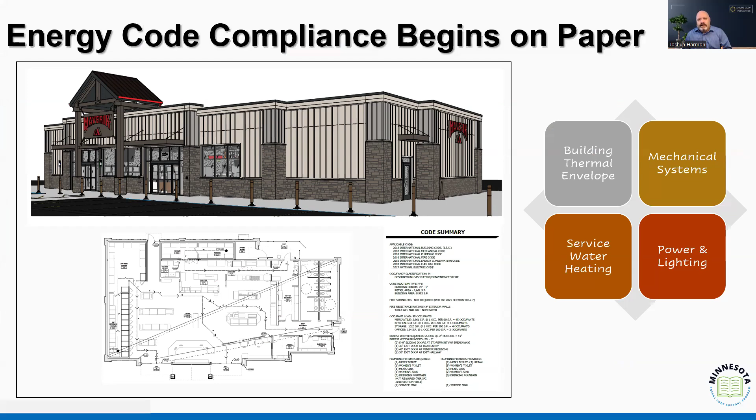When we talk about energy code compliance, we know that it really begins on paper. It begins with a set of construction details that give us all the things we need to know about how this project is going to work.

This is the relationship between building inspectors and plans examiners. This is why I've used this example before when I ran my department. We brought the two together, made sure we had staff meetings as a whole, even in a large jurisdiction with hundreds of employees. Every once in a while we would get together to make sure we had a consistent conversation about what I'm doing in the field and how that's being supported in the office, and vice versa—what are we missing in the plan review that would better serve the inspectors in the field, making sure that conversation is a two-way street.

Part of what we see in the energy code is a series of 8 different specified items that should be part of that construction detail. We talked about plan review last week, that's a different series, but we'll see here the dovetail between the two.

Energy code starts on paper, but energy code compliance requires inspections. There is no way that I, as a plans examiner sitting in my office, am able to use my binoculars and see every project. To the best of its ability, virtual inspections haven't gone that far, so we need people in the field actually verifying the installation of our building components and that they're being properly installed.

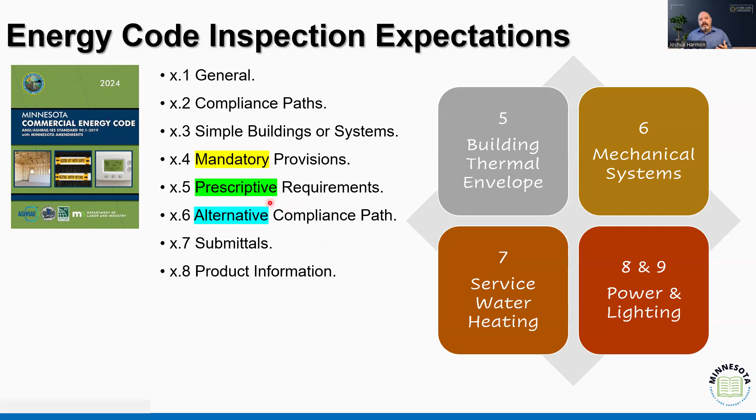So what we see in energy code is a recognition that energy code compliance paths are important, and as an inspector, they're important as well. This isn't just something we do at the front end of the process and then move on, saying okay, we're done, we don't have to worry about it again.

It's fundamentally, at least in my opinion - I was told earlier I've probably drank the Kool-Aid. I at least got this, I didn't drink the whole jug. I'm not the Kool-Aid man, although I do have a similar hairstyle - that's a reference for the older crowd in the group.

What we do see as an inspector, it's important to understand: when is the project following the prescriptive expectations of the code - the letter of the code, this is the method of installation, this is what I'm expecting - versus when we're using one of those alternatives? When I'm seeing an energy cost calculation, a performance design that incorporates different methods or levels of insulation - if I know I need an R20 in the wall and I go to that wall and it's got an R15, I need to know: is this a prescriptive project where that is not correct, or is this an energy rating or performance rating system compliance path where that might be appropriate given other components and characteristics I need to be aware of?

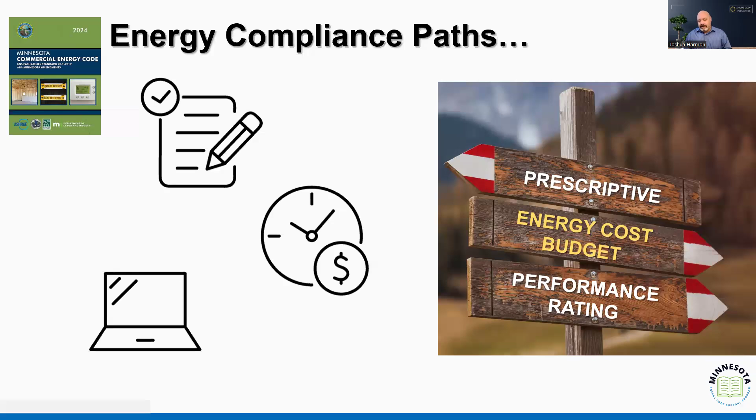My wife makes fun of me. She said, didn't realize you wanted to become a teacher when you started in inspections? No, but in our reality, that's kind of what we are. As inspectors, we don't just bring the hammer - we sometimes use the kid gloves and say, look, this is how this needs to be done to get it effectively installed.

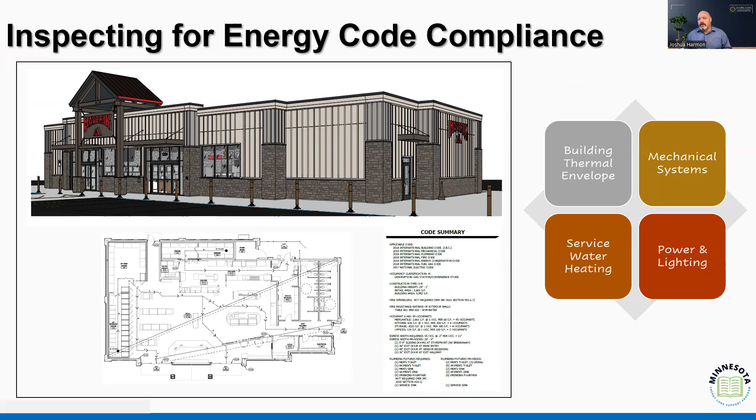Moving on - so when we start talking about inspecting for energy code compliance, we're looking at these four specific pillars of energy code compliance. Based on our understanding of the inspection and the information identified in the energy code, we can expect what we're going to inspect. There are certain components that we've been told in chapter 4 need to be provided, and as we go through each of those chapters, it reinforces some of those inspection expectations.

We're looking for things like insulation, fenestration, mechanical equipment. As we've talked about, there is no energy specifically used in the daily operation of insulation - my window doesn't have a power cord, my wall doesn't have a fuel burning furnace powering the insulation. Those are systems that work together to help the mechanical components properly operate, to effectively and efficiently utilize their energy sources to provide their expected purpose, which is probably going to be heating and cooling.

And especially this time of year, it's time for the heating, right? As we'll talk about throughout this series, when we talk about inspections, we're really talking about how they all work together. To just do the mechanical inspection and ignore the building thermal envelope would really be ineffective. It doesn't matter how effective - I can have a 99% efficient furnace, and if I have a hole in the wall, it's still going to lose heat.

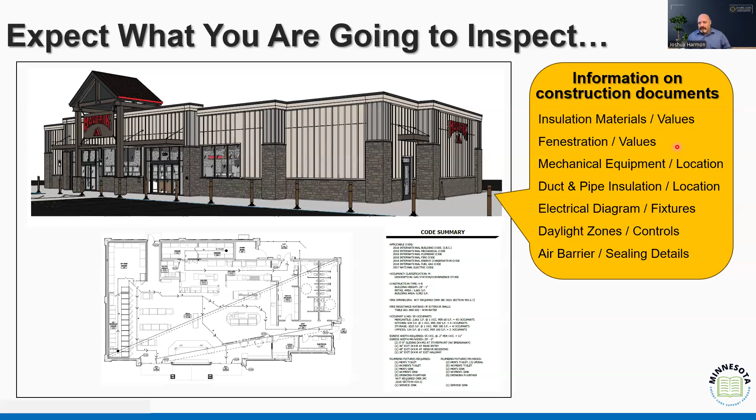Now, there's a level of controlled heat loss that we know is going to probably exist just because we can't put an R100 in the wall. But what we are looking for is that controlled level of exfiltration, or a controlled level of heat loss. The same way when we talk about mechanical systems, we talk about a known air infiltration rate - we know the building's going to bring in air, how much air, and do we know how much it's going to be? So we can control and calculate those values.

Anyhow, digression, we'll keep going. So we talk about insulation and the building thermal inspections associated with it.

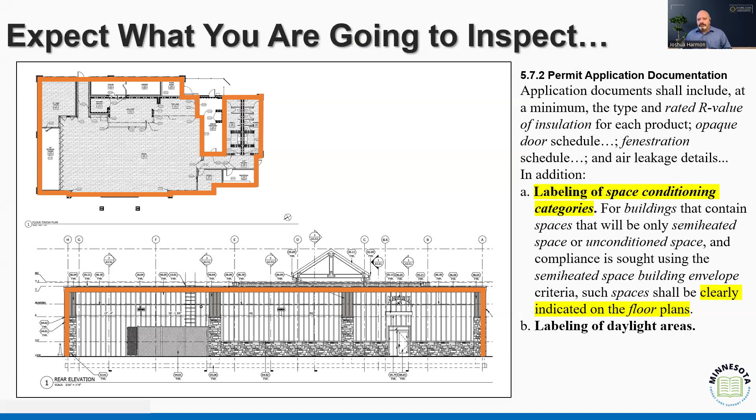Within that, we understand there's the code identifies specific concepts like building envelopes and exterior versus semi-exterior, when we're enclosing semi-heated spaces versus unconditioned or conditioned spaces. And within that system, we know not only where it is, but kind of what it is. So we're looking at these types of assemblies as part of that process.

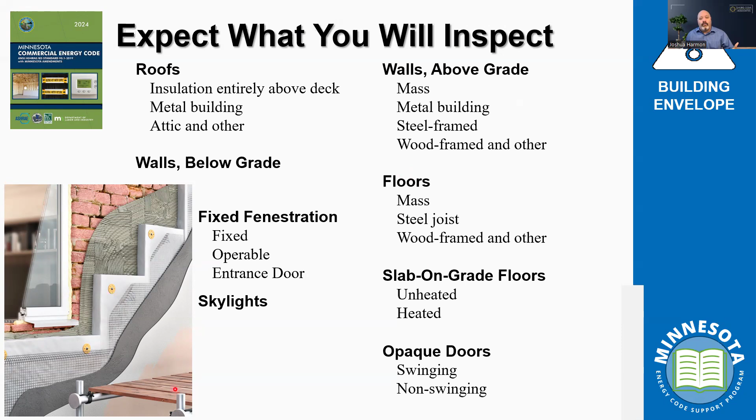Whether that's roofs and horizontal systems like roofs and floors versus vertical systems like walls, and fenestration. So how do these systems all work together to properly isolate and control the scope of my conditioned space? As an inspector, I want to know where am I looking, what am I looking at, and more importantly, what am I looking for.

That's when we get into this concept of the building, the R values and U factors associated with the insulation. Insulation is the primary vehicle for thermal resistance, and so we use that as kind of our first linchpin in this conversation. But we know that there are a variety of different types of insulation that could be available to a design.

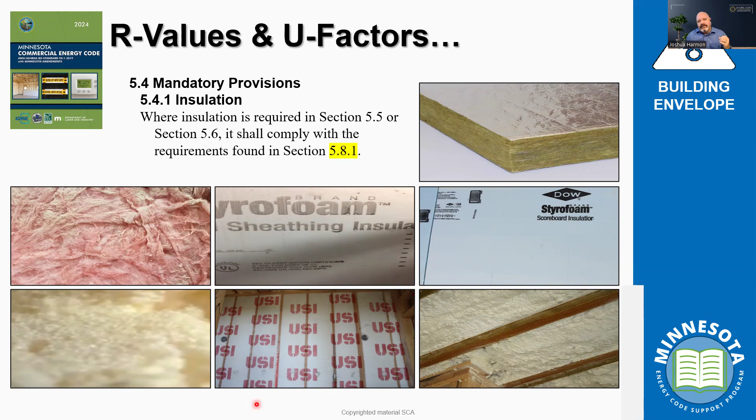So we'll see through this process what are the different ways we evaluate those insulation materials. The code gives us some options, and one is going to be our prescriptive compliance path.

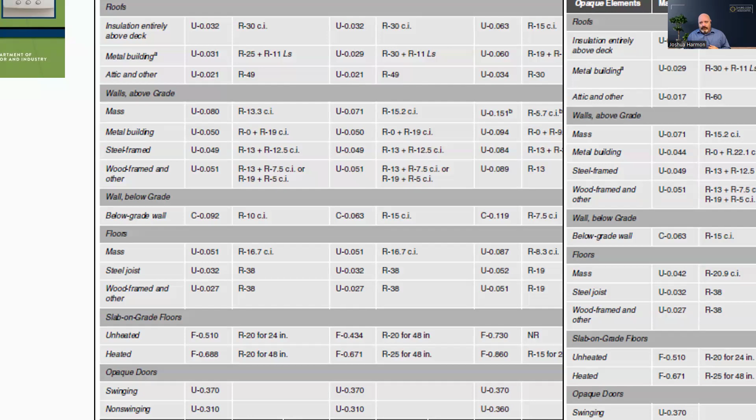Again, I need to know, is this the table that I'm using if I'm doing my inspection? Do I know that if I'm looking for a wood frame wall, I'm looking for that R19 with a 5 continuous? But when I show up, I see that they don't have any continuous insulation. So what am I doing?

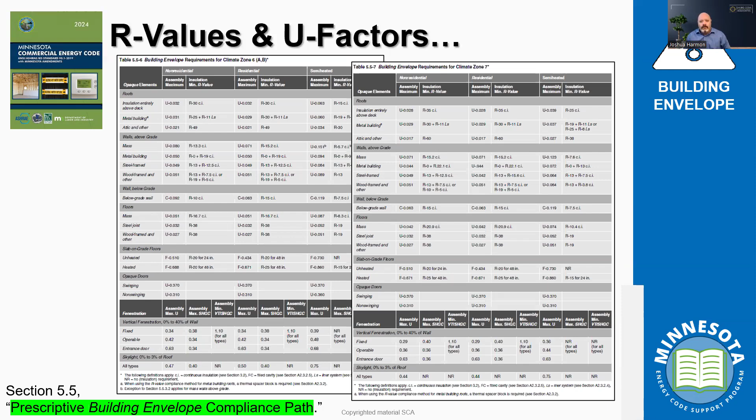If I'm following that prescriptive compliance path, I'm looking for the table, the values found in the table, that's the R value. Now remember, this is the minimum R value for a particular component or assembly. Those R values are reflective of the amount of heat that transfers through that material. As we get higher numbers, that means less heat is passing through, it has greater resistance to heat loss, heat transfer through that system.

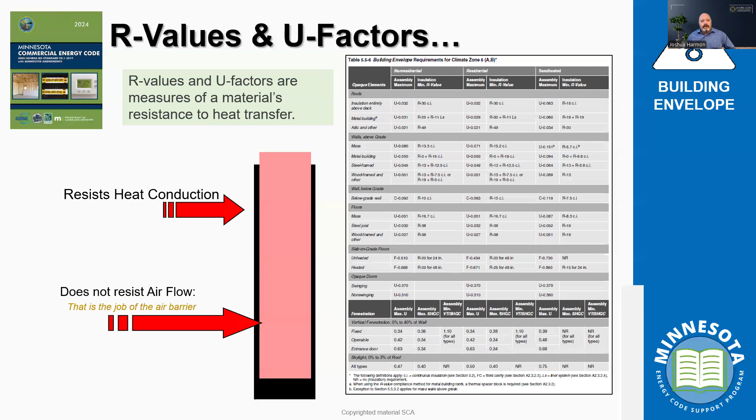And then the alternative to our R value is going to be our U factor. So we're given a couple different options, in this innovative, flexible way we view energy code compliance. We have the R value, which is the individual material, and we have the U factor, which is the total evaluation of the assembly.

So we start to include insulating boards, sheathing and exterior cladding, interior cladding, or interior coverings. We look at the entire assembly and calculate all those components together, multiply them by their potential framing factors, how much of that wall is wood versus cavity, depending on designs.

And we come to what is going to be ultimately a U value. This is going to be that amount, the value that drives how much heat loss goes through the assembly as a whole, weighting all the components that exist.

So in this design we see here, we've got an R13 in the wall cavity and an R3.5 continuous insulation board. 13 in the cavity, 3.5 in the continuous insulation. That gives us a U factor of 0.057. This value, this design, and we're looking at a wood frame wall in this particular design.

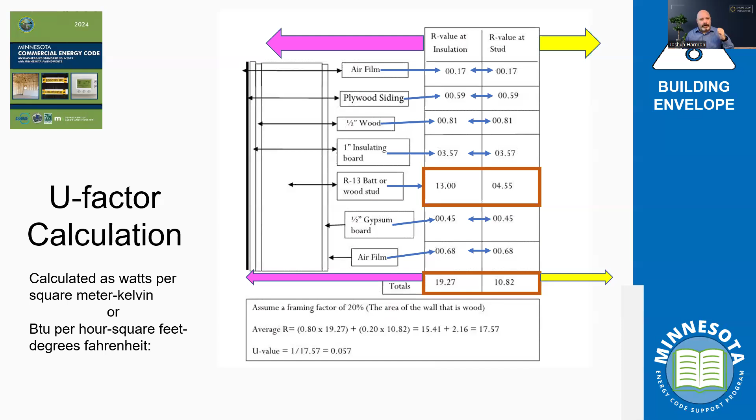Hopefully that answered that question. But again, that value is something that you're going to have specific to this wall design, incorporating the amount of windows, the amount of wall, the amount of cavity. So yeah, we can have some variety. This is why it's important to understand what's my compliance path, what's my expectation, and when plan review is done properly, and we have these values identified on my construction details, it makes it even that much easier.

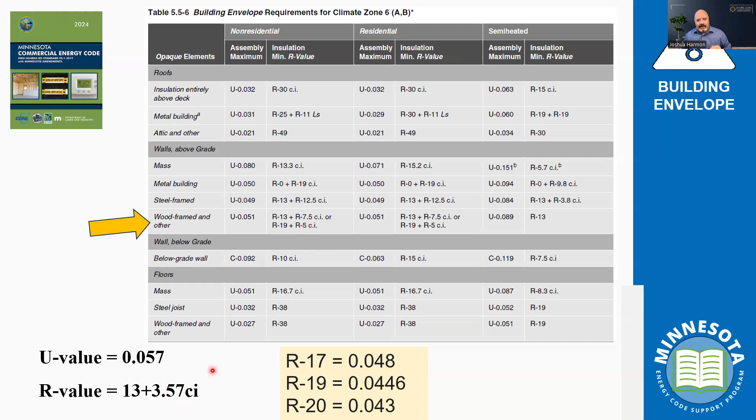I know that I'm looking for an R17 with 3.5 continuous. It's not my memory saying, oh no, you have to have an R19. Nope, I don't have to have an R19 because I'm using the U factor calculation at a 0.048. Make sure knowing these things are important for me as an inspector.

Part of what we also know is, so we have the prescriptive compliance, then we have the building trade-off compliance. That's when we're seeing something like a ComCheck or some other report that's done the math associated with this calculation. And so again, that document is going to tell me what am I expecting at the cavity, what am I expecting in continuous. And then that's also going to drive the conversation when it comes to what's supposed to be installed in the field.

Now I'll say it again, I've said it before - I've very rarely been on a job site where the contractor's walking around with a ComCheck in their hand. That's why as plans examiners, I encourage us to make sure that it's not just the ComCheck, but that those values are written on the construction details. Because we want to make sure it's everywhere possible, so that when we get on site, we're not saying, well, where's your ComCheck? It's not on your plan, so I need the ComCheck. Well, I don't know where the ComCheck is. So again, making sure that we have all those details on the construction documents that are provided at the site.

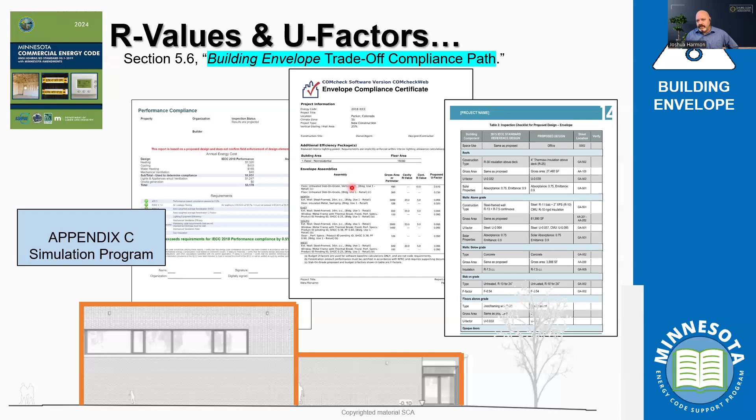But again, this trade-off is looking at how does that overall thermal envelope work - where can I trade off? Can I get less insulation in the wall if I have more windows, or better windows, or less windows means I can get away with certain things. So again, that's the mathematical calculation determined through this system, through a series of systems. And we'll talk more about some of those different systems as we go through.

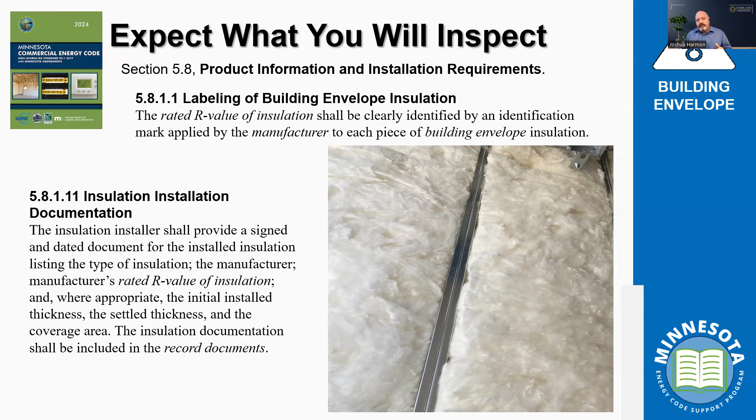Part of the expectation is always going to be labeling and proper installation, following the manufacturer's installation instructions. So again, as a contractor, as an inspector, I need to know what are those expectations. Am I looking for labeling on certain types of materials, or am I looking for a report that says what was installed? Because if I don't know what to expect, it's going to cause more problems.

I cannot look at this bat and tell you just by visual acuity what this is. I need somebody to mark it. What did you install, right? I'm not suggesting contractors are nefarious, but I can't utilize, hey, there's some trash over here that says this is an R21. No, I want to see it on the document, on the piece of equipment. I want to see that R19.

And then if this person lied to me, guess what? They committed the infraction, right? I don't like lying on government forms, right? That's why I like other people. If somebody's gonna get in trouble for lying, it's gonna be this guy, right? Not me.

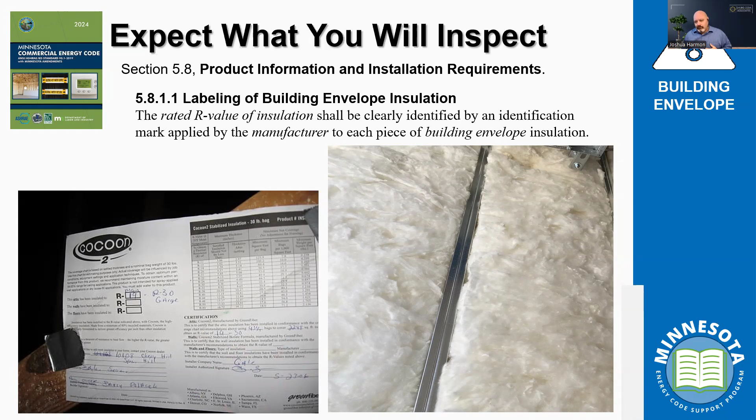There's also installation instructions, and we'll talk about these again in greater detail as we go through. But again, whether we're looking at loose fill insulation or something that requires baffling, what are we expecting to accomplish? We want that baffle to be properly installed so that air flows through the design and doesn't affect the insulation of maybe some loose filled fiberglass or cellulose. We'll show some examples in our next section when we talk about installation of some of these issues we've seen.

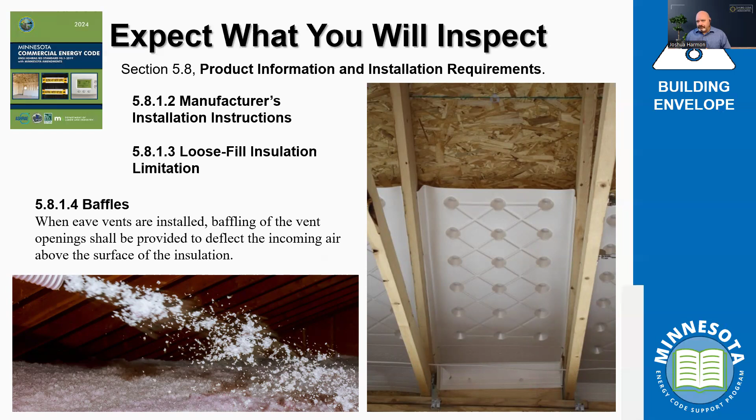And again, we have ratings associated with substantial contact and recessed equipment, installation of protections for our insulation. We want to make sure that the insulation doesn't become deteriorated through just standard preventable damage, either by maintenance equipment or by other things like landscaping, sunlight, those kinds of things.

I can say as a bad child in my youth, I didn't quite understand what the plastic outside of my wall was at my house, and so I thought it was cool to watch it burn. I was a little bit of a pyro. Not that I got in trouble for it, but I got in trouble by mom, when she found me out there burning the water barrier. Now, we can't stop all stupid, you can't stop stupid like me, but we can do what we can to prevent it from just expected damage.

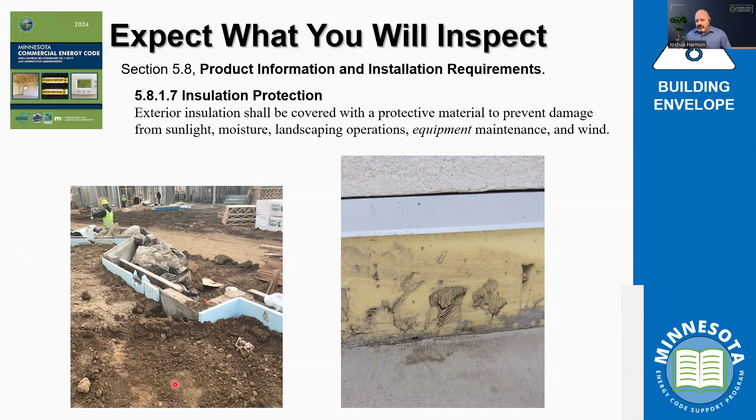As an inspector, we would want to know that. When we talk about the extent of roof insulation, this is an example of where the code tells us that they have to be staggered, but the code doesn't get into the level of how do they get staggered. I've been in trainings where people have said, well, it's whatever I say it is, that's what staggered means. If I think it needs to be 2 feet, it needs to be 2 feet. If I think it needs to be 4 feet, it needs to be 4 feet. Well, what does the manufacturer's installation say? How was it tested to perform? That's usually a better way to determine the expected staggering of this particular design of rigid insulation.

The same thing happens when we talk about house wrap. If it's 9-inch overlapped, there are certain designs that say that works for a water resistant barrier. If it's 12 inches, now it's going to be an air barrier, and it's going to be sealed. So again, what does the manufacturer say for its installation? Trust me, the manufacturers want their product used, and so we want to make sure that we understand what are those installation expectations.

And again, this is one of those realities where we may be using technology to assist us, but make sure that that technology works. Using a drone to do an inspection on the roof system, we want to make sure that we can actually visualize these staggering expectations. Are we sealing each layer of this stagger? I don't know. I need to know what's expected from the manufacturer and what's being done.

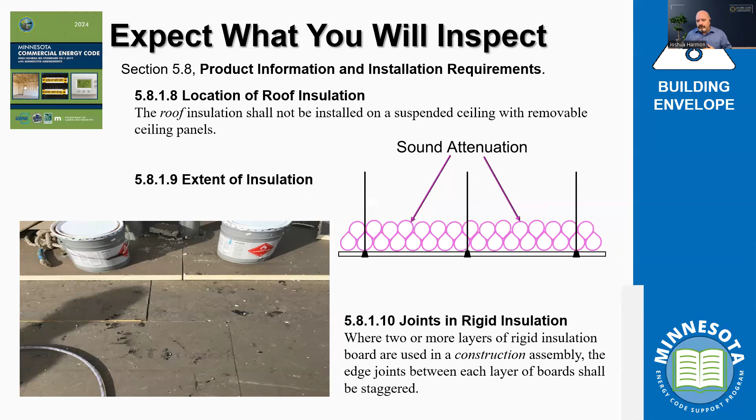But like we said earlier, insulation is not the only component in that building thermal envelope. It also includes the concept of fenestration. We know the code identifies for us a variety of different expectations on the U factor, right? Because we're looking at the assembly as a window, right? The framing, the glass, everything involved.

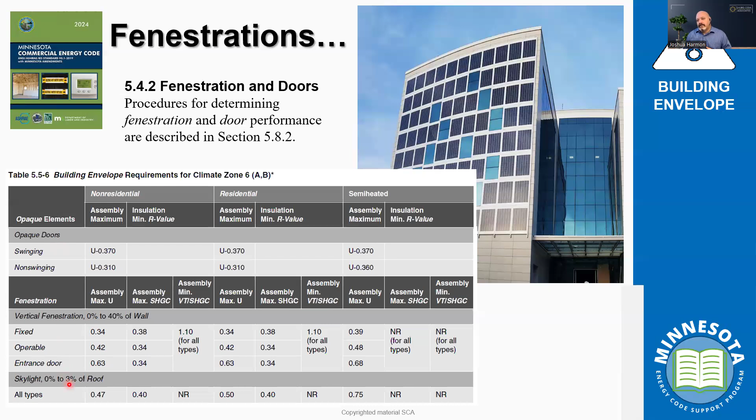And so in the space, the air spaces or gases that exist in between those panes, that's how we calculate these U factors. And what are those maximum U factors we're going to allow in different types of fenestration, whether that's doors, windows, or skylights? When we start to evaluate those things, that's where it's important for the building inspector to understand. It was designed to have this level of U factor.

And that U factor impacts how much heat is lost through that assembly or moves through that assembly. Heat loss, heat gain, right? Depending on the season. We're talking heat loss right now because it's so cold out. But if that window doesn't have the appropriate U factor, then we're going to lose more heat through it, and that could affect how well our equipment works. We've based our equipment design on a certain level of air infiltration and exfiltration, and if the windows don't match with what we've designed, then our entire mechanical design is going to be off, right? It won't work the way we've designed it.

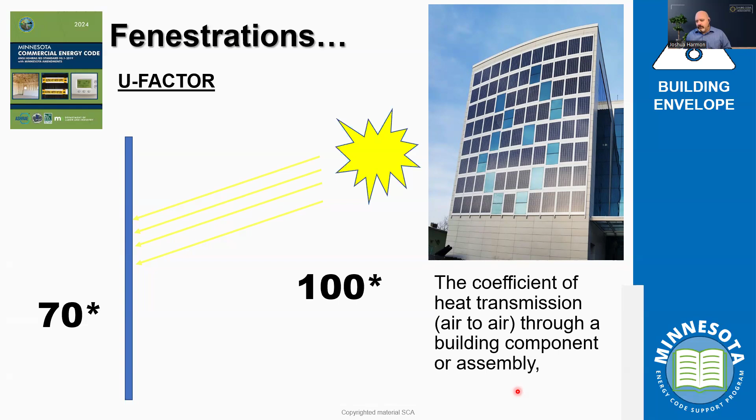Same thing with solar heat gain. Solar heat gain is the amount of solar radiation impact on the temperature of an interior space, right? So how much are we allowing the solar radiation to impact the interior design, the interior latent temperatures? And so again, those are things that we need to know.

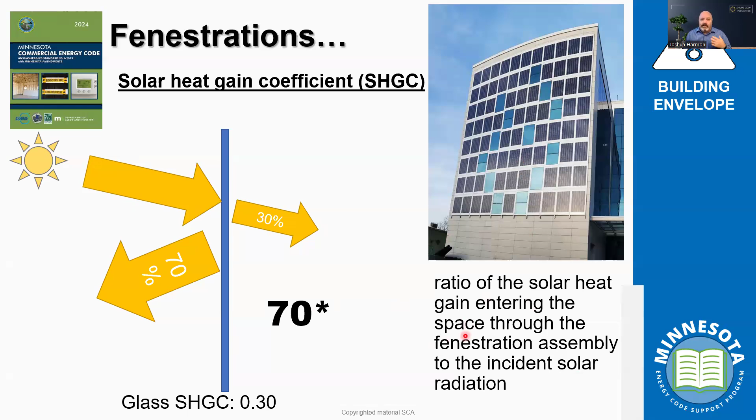Now, I've had people ask, okay, so if I go out and do this inspection and I'm looking at a window, and let's say in this projected wall system these 4 rows are supposed to be a U.3, and these are supposed to be a U.2, and they've got them reversed, would you make them replace it? Absolutely. You did it wrong, right? If they put the wrong door in, am I going to say it's okay? It's okay if it doesn't match the plans? No, I'm going to make them do what I know needs to be done.

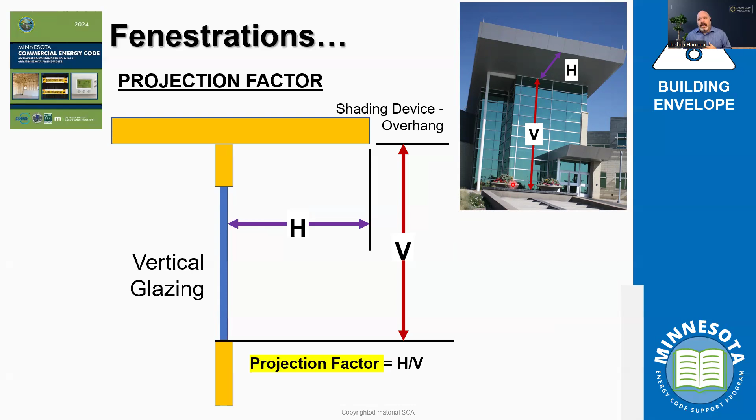And that's where it's important when we start looking at designs. This is the one thing that when my plans examiners and my inspectors got together, this was the biggest issue we always had: proper identification of window values, right? We get, okay, this window has to be this size. But if that plan detail does not say what level of air leakage and solar heat gain is supposed to be there, that makes it very difficult for me. I know the size of window is different.

And that's where it really became a conversation that over time, our plans examiners expected out of our contractors and designers: we want each of these windows, if we're going to have different window types and different elevations, specified on the details. What are those expectations for air leakage? What are those air leakage U factors and solar heat gains, right? Because that way they can be effective in their job as inspectors. They're not saying, oh, I know you're supposed to put a window here, so as long as it fits in the hole. No, I want to know what the air leakage is, because our inspectors took seriously their role as protectors of the public. They want to make sure it's not overheating in certain areas and impacting how this equipment is going to operate.

So again, the code provides us a variety of different expectations and minimum and maximum air leakage rates associated with these designs. And so again, if those specifications are on the detail, then our inspectors can do their job and make sure, right? Our plans examiners don't have to put their binoculars on. They've given the work to the inspector, and the inspector will accomplish it.

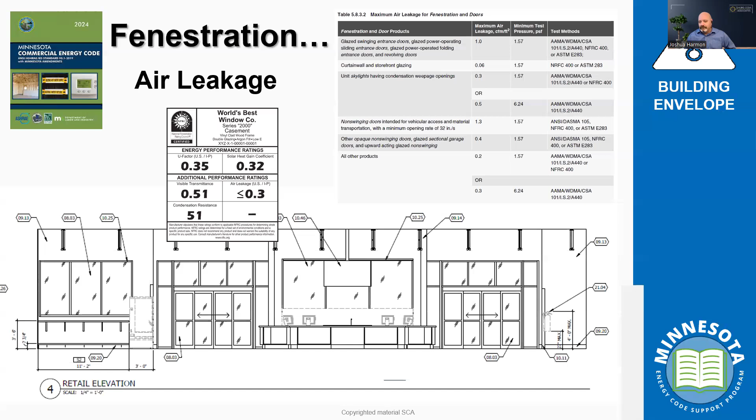Now, understanding that air leakage reinforces that air barriers aren't an afterthought, right? They can't be an afterthought. The code identifies them as one of those details that needs to be included as far as air sealing, because the code recognizes that air movement has consequences. It not only affects the thermal resistance, but it also affects things like vapor and water transfer, or pollutants, smog, smoke, exhaust, that move in and out.

When you think about what's going on out in California right now, if there are fires, then poor air movement control, poor air leakage control means the infiltration of smoke into the neighborhoods. If people have allergens, and they're allergic to certain types of things, and they aren't able to control their thermal envelope the way they thought they were, then it can impact their health.

I remember several times I lived near farmers, and those farmers would come over and apologize, saying we've been spraying the fields and there's some significant smells. I'd say, you know what, I appreciate you, but we've got a great thermal envelope, so we don't smell it. They'd say, oh really? Yeah, we've done our part to ensure that our occupants, our family, can be in a space.

My old office at the county was down by the county landfill. So if the air barriers weren't properly installed, we would know it, because when you stepped outside, you could smell the landfill. But inside, it was beautiful. Again, that's about properly protecting the occupants.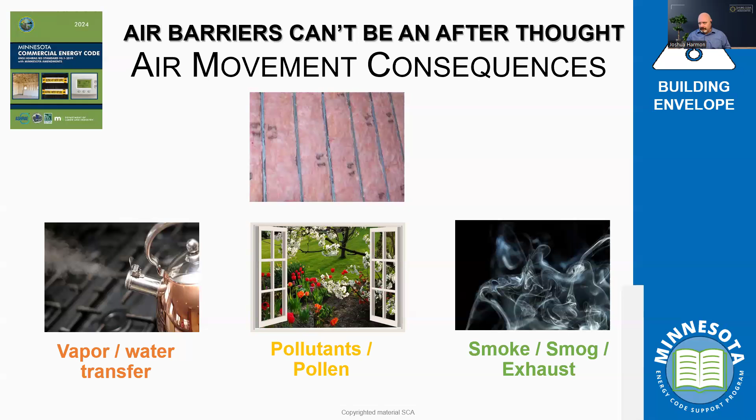That also includes things like weather strips, weather seals around loading docks, vestibules, revolving doors. We'll talk more about vestibules and entrances in a couple weeks when we really bring that up. But again, other things required by the code are going to be these mechanical systems.

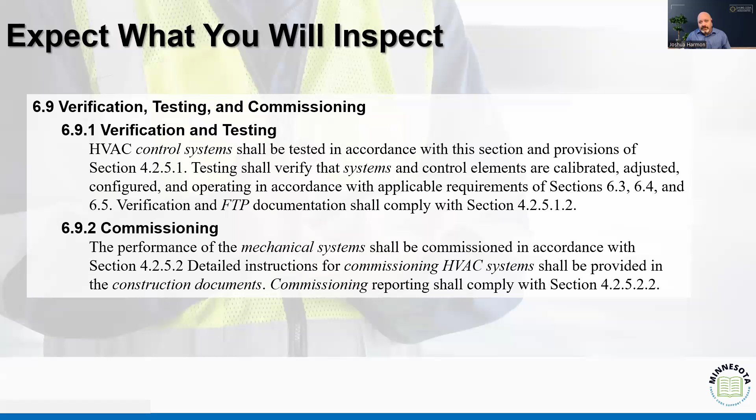Now, the Energy Code reminds us that we need to look for certain types of verification and commissioning associated with certain types of equipment. But from the design perspective, when we see it in action, we know that we're looking for design calcs, distribution, equipment efficiency, and controls like we talked about earlier.

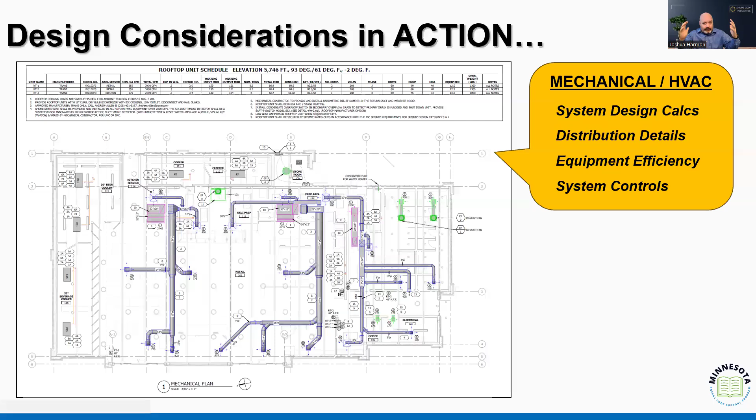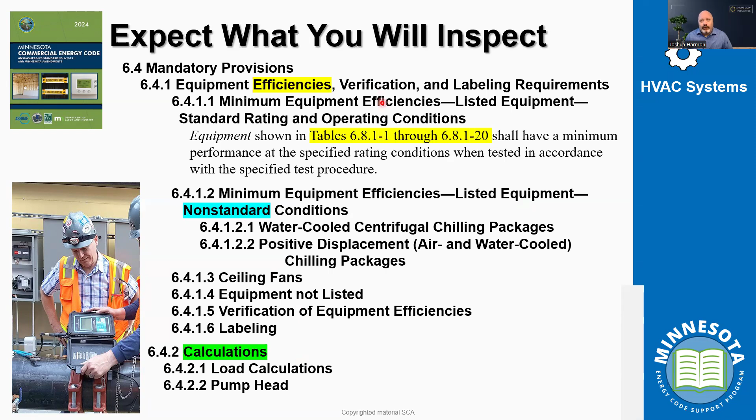Well, what does that mean to an inspector? To an inspector, that means I have to understand that there was a calculation run, the plan review did their part, and particular equipment efficiencies were identified. My job is to be the one in the field making sure those things are installed as was required, as was specified or approved.

If I go out and see that there are 3 mechanical systems to be installed, with their rating, their sizes, their efficiency ratings, I'm going to make sure they're there. I'm not going to say, well, they put in 3 systems, and yeah, they're the same size, they're just not as efficient. No, this is part of that relationship, where the plans examiner did their part and made sure the proper SEER rating was on the equipment.

You make sure the proper SEER rating is on the equipment in the field. Make sure it's the right size. You don't go out there and say, hey, they're putting in a 1-ton unit, and when I got there there was a 2-ton unit. Well, is it oversized? To what degree? Is that approved? Do you want to do that in-field plan review?

No. And again, we want to make sure, or maybe it's the opposite, where they're supposed to put in a 2-ton and they put in a 1-ton. That's going to be the problem we start to address. So as an inspector, I'm verifying that what was expected is what's installed, and that means I should be looking at every piece of equipment.

You wouldn't shortchange it if it was individual projects. So when you have a project with 20 different pieces of equipment, you inspect all 20. You don't say, well, the way I would treat it if that was 20 different projects, I would not sit there and say I'm only doing 18 projects this week, I'm going to look at all 20. So I'm going to do the same thing with my building projects—look at each piece of equipment and make sure it's properly installed.

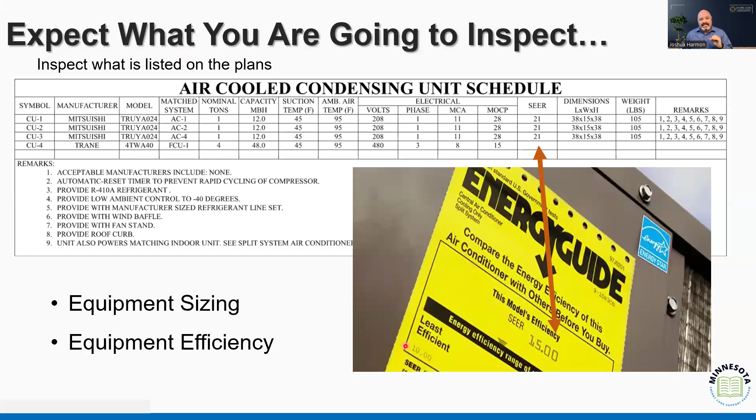I'm not going to guess or assume. Well, if I am going to guess or do some kind of random sample of designs, then I'm going to have that as part of my policy, and I'm going to know what I'm expected to inspect, because expecting what you're going to inspect is the key to a successful inspection process. That also includes things like controls—we understand controls have been identified and sequences have been evaluated by the plans examiner, so when I go on the site, I need to know what kind of controls are for each individual unit.

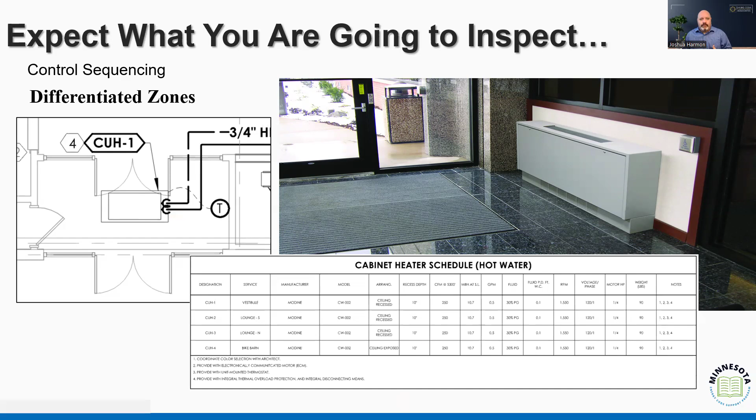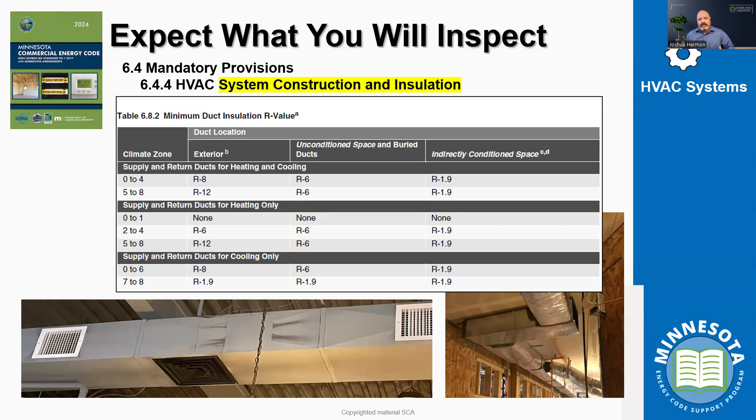When I have this entrance space and this unit, I'm making sure that we have the proper controls in place and sequences, and that also includes the installation and construction of that distribution system. We know the code identifies certain insulation values given the location, so I need to know, is this within the thermal envelope? Is this supposed to be insulated? What are those insulation expectations? And part of that too includes understanding what the building was.

If my original design, and this happened to me, I couldn't find a picture beforehand, so I've called them and I'm going to go take a picture soon. When this originally was designed, this was one large warehouse. When we go out to do our inspection, we see steel framing because they're installing 36 different office spaces in there. Wait a minute, that's not the mechanical design. Your mechanical design was based on a large warehouse, a 100,000 square foot warehouse. We're now adding in a series of offices, so we need to recalculate or reassess the mechanical need, the mechanical load of that building.

Same thing when we start talking about other designs. If I'm going in expecting that this is going to be a warehouse or an office building, and it turns into, well, it's not just an office building, it's also an office building with vehicle maintenance, a spray paint, and a car wash area, then again I'm going to evaluate how these are going to effectively meet the load for ventilation, exhaust, and space conditioning. Those are all parts of my inspection as a mechanical inspector, and it's also part of the energy inspection. We want to make sure we're accurately evaluating the system's design, and if you've told me this is going to be a certain way, it needs to be reflective of that design. That's my role as an inspector.

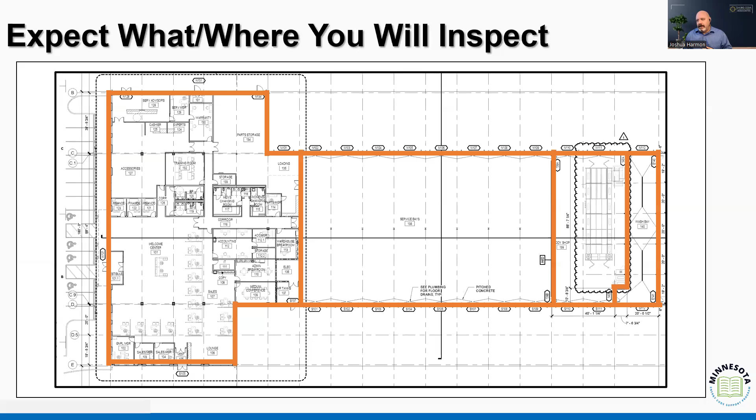Looking at the ductwork to make sure it's properly installed, properly sealed, making sure we don't have these types of issues - kinking, I think it's the best way I can call it, kinking the ventilation. So again, we have proper flow, proper insulation, proper installation, proper sealing of some of these penetrations, terminations, and those kinds of things. We want to make sure these systems work effectively.

We understand there's a certain level of duct leakage permitted by the code, because the code understands that we should be inspecting them. We don't just allow it to be, 'we trust this guy, he's never gone wrong before, we'll go with it.' We need to have those expectations when we go out in the field.

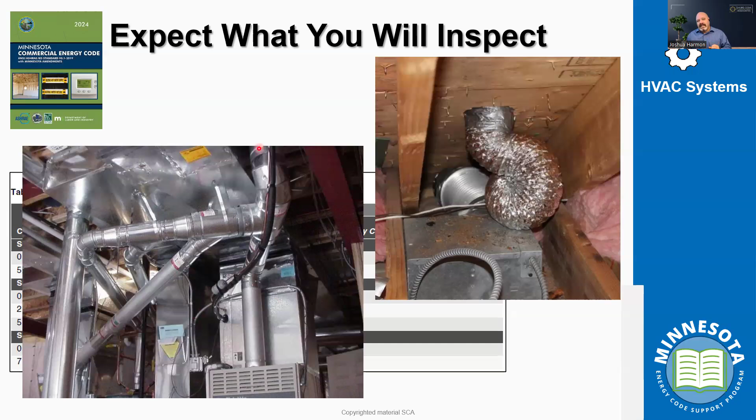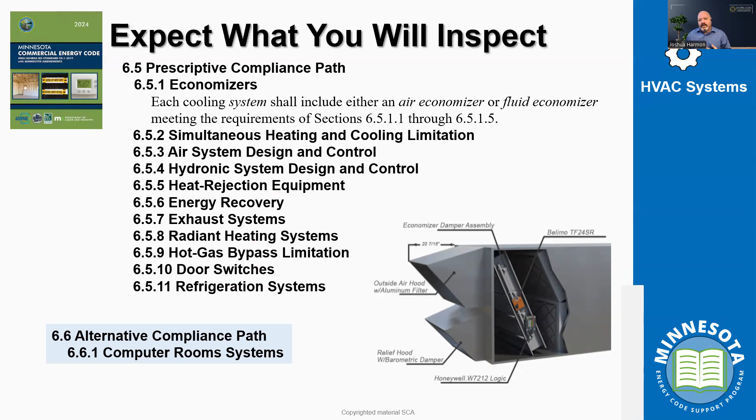The code also gets into a variety of different types of prescriptive equipment. Again, if we have these types of equipment, then the code would tell us what we need to expect. And as plans examiners doing their job, we should have these details for the inspector in the field. We'll talk more about mechanical systems and get a little deeper into what we're looking for when we discuss mechanical inspections later.

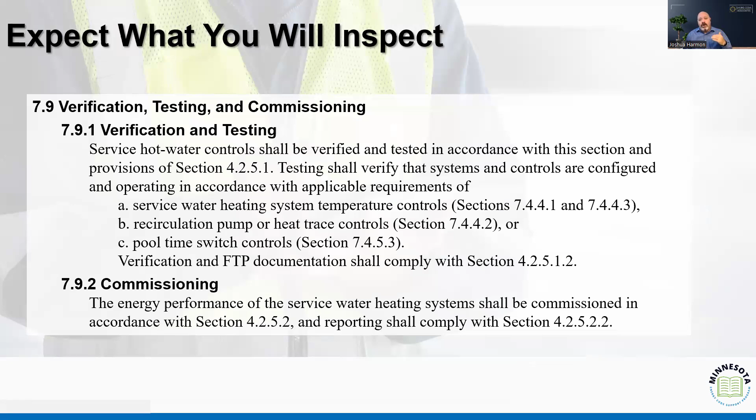Mechanical also incorporates service water heating, obviously, like we talked about, and that section addresses controls, efficiencies, and different expectations. Again, knowing we have mandatory requirements for the load calculation - are we addressing pools? Is there a pool? Is there a heat trap associated with the design? Are we thinking about what our recirculation pumps look like?

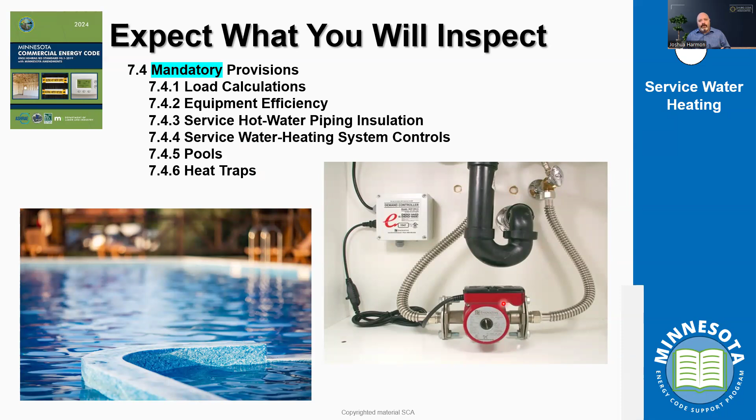One of the things we look for when we do these inspections is the difference between fuel systems - if we're expecting to see an electric water heater and we show up and there's a natural gas InstaHot. Did we think about that when we sized our equipment? Did we think about that when we thought about all the other components associated with the design?

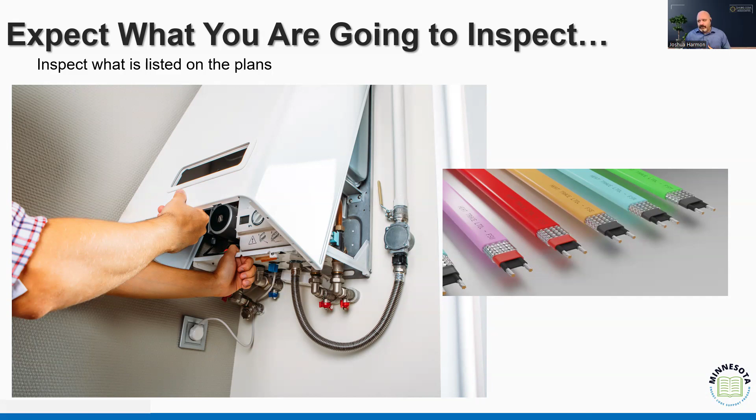And again, heat trace - do we have proper controls so that we're not constantly running heat trace when there's no use for the system, or the temperature doesn't require the use of these systems? And again, like we said, there's going to be some prescriptive components when it comes to the size of equipment and capacities. We'll talk about those in more detail later.

We don't have time, I got 10 minutes to get through the rest of this.

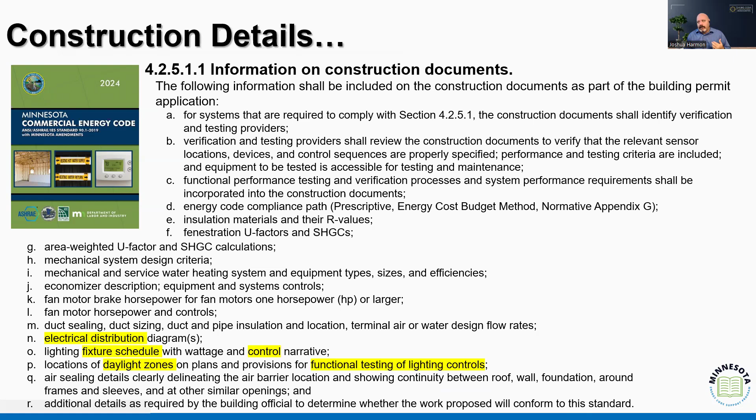So when we think about electrical components, we think about the electrical lighting, the power, the calculations. We think about power calculations, we think about controls, we think about the efficacy of the lamps.

Some of those are easier than others to do, right? But when we start thinking about how do we verify, the code again reminds us to verify it. And we know that automatic controls were removed from the state's adoption. So we want to make sure we recognize that.

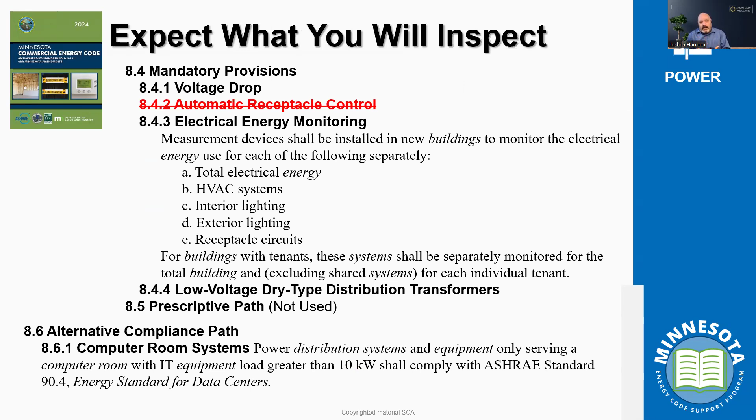But when we start thinking about how did we calculate that power, again, we calculate that power based on a certain type of design, right? The code tells us that we should be looking at either the simplified building method, the building area, or the space by space method.

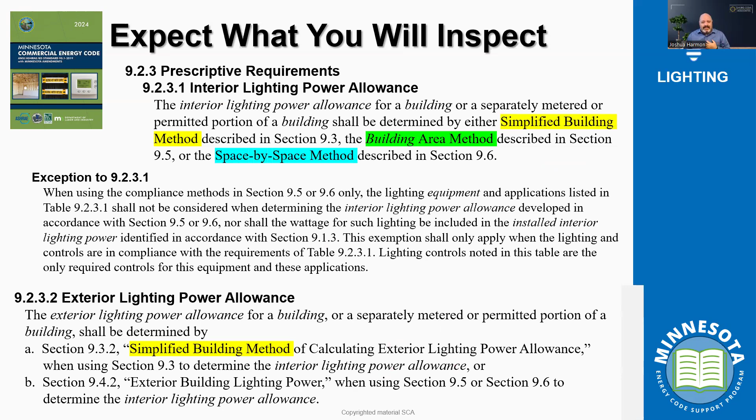As an inspector, these are design considerations, right? We understand that this is design considerations. As an inspector, I'm making sure that what they designed for is what the building's being used for, right? If they use one of the simplified options and we go out there and it's not the simplified process they thought it would be, right? They put down, we're just doing an office building, right? Well, is that office building this, or is the office building the entire addition, the building, right? What are we looking for? This really wouldn't be a simplified building.

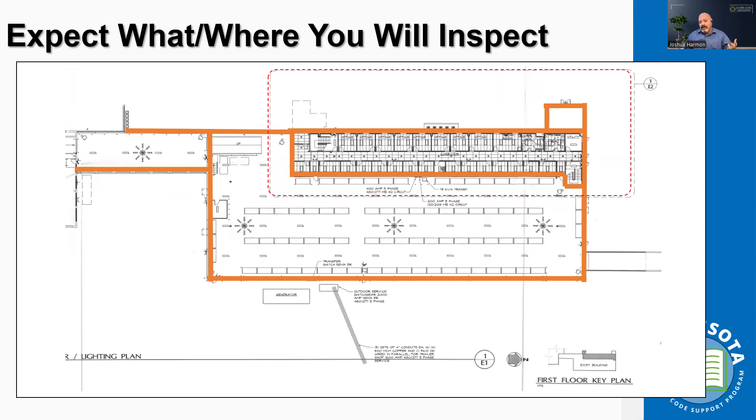This is more of a space by space calculation, right? And so that means we have to think about those kinds of considerations. We want to make sure that we're seeing in the field what our plans examiner reviewed, right? We think about lighting controls and what those expectations are.

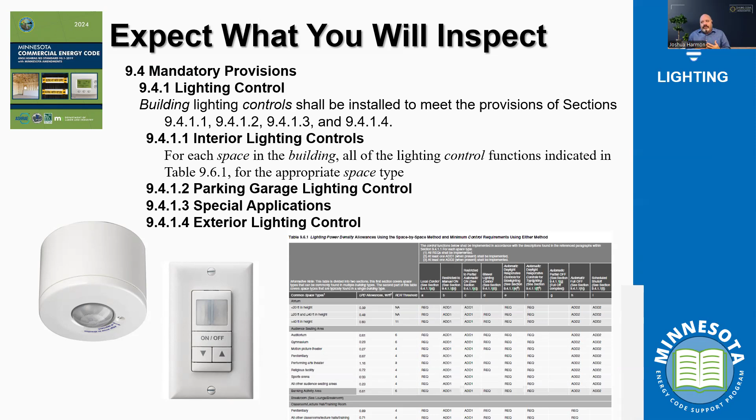Again, we'll have deeper conversations about those. But again, part of that responsibility, that relationship, is that my plans examiner has reviewed the project, determined the locations, and how they match and flow with the different expectations of the system. And so then we're doing that verification in the field, right?

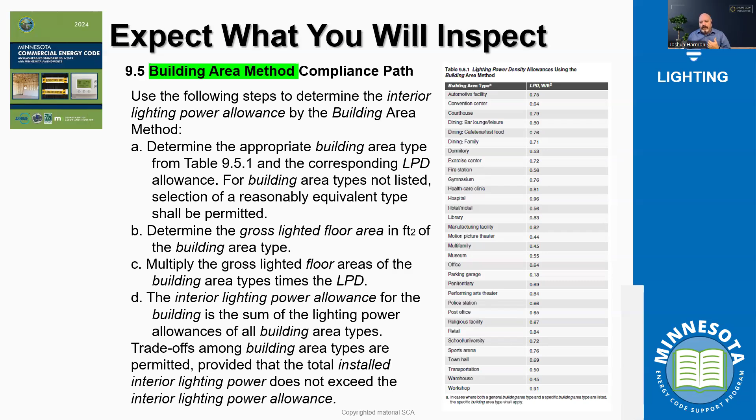Again, if we're looking at a system and we see that the building area is more than what was identified, and the square footages are off, or the uses are off, then maybe they need to go to a space by space calculation for that alternative compliance. That's again where we are, as the inspectors, the eyes of the plans examiner in the field doing the work.

And when we get into the conversation, we'll talk more about how we need to evaluate what's necessarily required lighting controls versus secondary controls, or when we're talking about do we need to have dimmers versus time switches versus the different components and sequencing. Those are conversations, that relationship where the plans examiners reviewed some of this with the designer. Now we're reviewing it with the installer in the field to make sure that the project is successful.

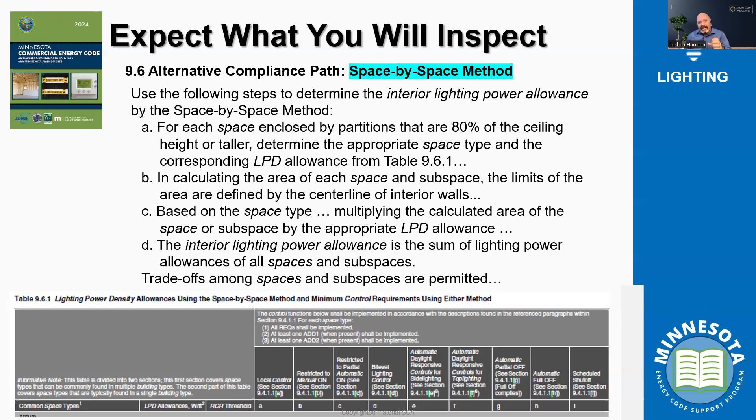I think about elevators, right? When I come out, when I'll be out there next week for the U of M conference training series, I guarantee that my brain is at least once going to think about, I wonder if this elevator shut down as I go up to my room, right? Does it de-energize as it's supposed to?

When I walk through the airport, I'm looking to see, does the escalator actually slow down, right? I've been in the airport when it does, right? And Denver is one where you can walk through and you can see when there's nobody on it and you're sitting there waiting. There's nothing more. I don't know if you guys are people watchers. I'm a people watcher. And so I'll sit there and I'll just watch the escalator. I look weird, right? I'll admit that. But when I'm watching that escalator, I'm watching it slow when there's nobody on the escalator, when there's no traffic. You can see the sensor that calculates when it comes on.

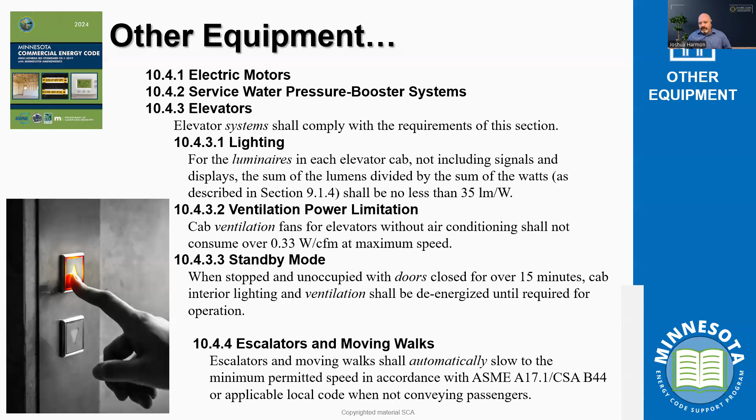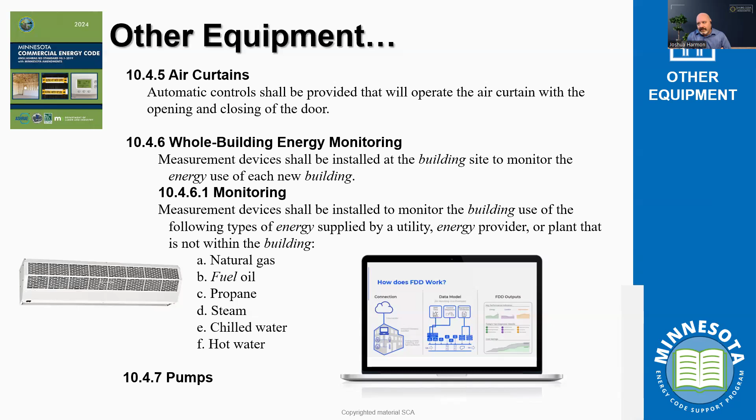I think at MSP out there in Minneapolis, I think that system, if I remember correctly, as you get ready to exit, it says, please watch, please pay attention as you exit, right? It's got the sensors. And so those same sensors can be used sometimes to restrict or augment the flow of those devices. So again, there is some equipment that is part of the system that code identifies having additional expectations. And so, again, that's where we come in as the eyes and ears in the field.

So, in really thinking about it as a wrap up, and again, if anybody has questions, feel free to reach out, put them in the chat or Q&A, whatever makes sense. But really, as an inspector, what I'm looking for is the impact that design has on me as an inspector—I need to know those compliance paths.

I need to understand what is and where is the building thermal envelope and how is it combined. We're going to take that in a little deeper conversation. The HVAC and water heating systems—again, we'll have a conversation about how we integrate mechanical inspections with energy inspections and performing those in-field verifications.

And then with the lighting components, whether that's part of the final or part of the rough-ins, we're looking for those lighting occupancies to be consistent. We're looking for those fixtures to be where they're supposed to be.

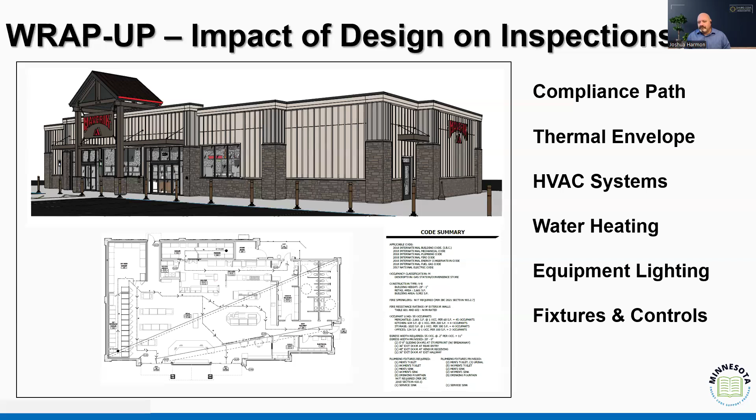As far as upcoming training, our next webinar next week is going to be on metal buildings. We're going to look at metal buildings in a couple different varieties, from both a plan and an inspection perspective. And then we'll get back to our normal conversation about design.